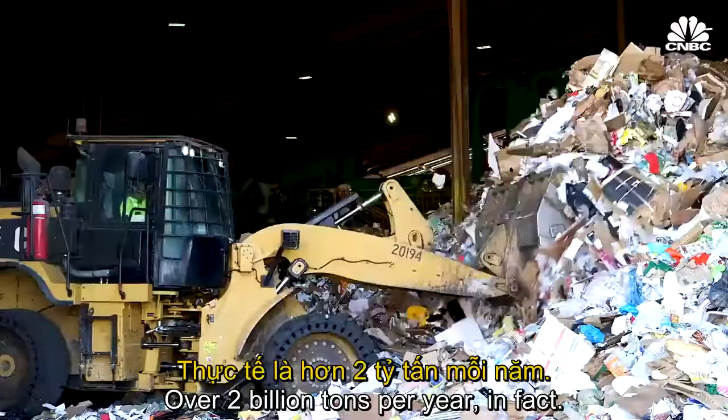Our society produces a lot of waste, over 2 billion tons per year, a number expected to grow by 70% by 2050. That's a line of garbage trucks stretching from San Francisco to New York City every single day. Organic materials in landfills decompose and produce methane, a very potent greenhouse gas. Solid waste—plastics, paper, cardboard—there's a lot of energy within those, carbon and hydrogen. Why don't you do something useful with it?

Converting waste into energy is not a new idea. Usually, though, this has meant incineration, that is, burning our trash to recover some energy. But that has major drawbacks. Incineration creates toxic ash and hazardous chemicals called dioxins, and heat and electricity are pretty much the only usable outputs.

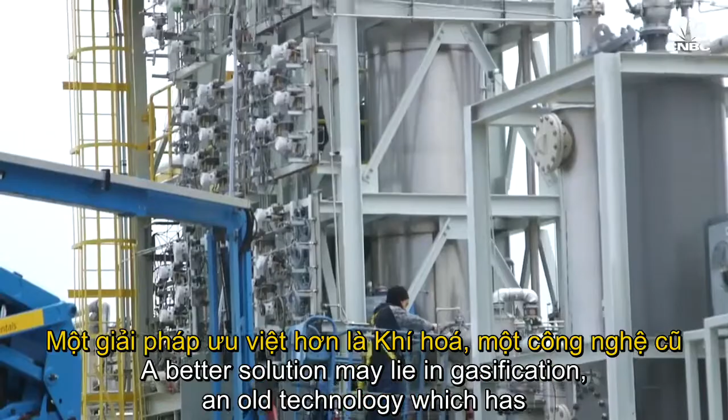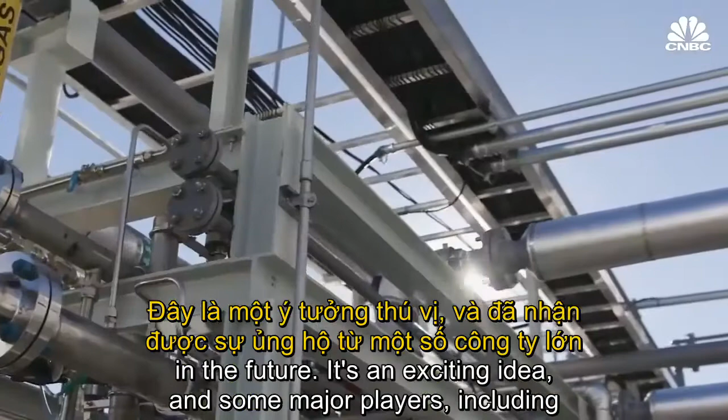A better solution may lie in gasification, an old technology which has only recently been repurposed as a way to deal with our waste. Gasification companies don't burn trash. Instead, they turn it into a gas, in a process that they say is both economical and eco-friendly. The focus is on producing a good quality syngas that can be converted into higher value energy products on the back end, be it electricity, hydrogen, diesel fuel, possibly even chemicals, fertilizer, etc. in the future. It's an exciting idea, and some major players, including the Bill Gates-led fund Breakthrough Energy Ventures, have thrown their weight behind it.

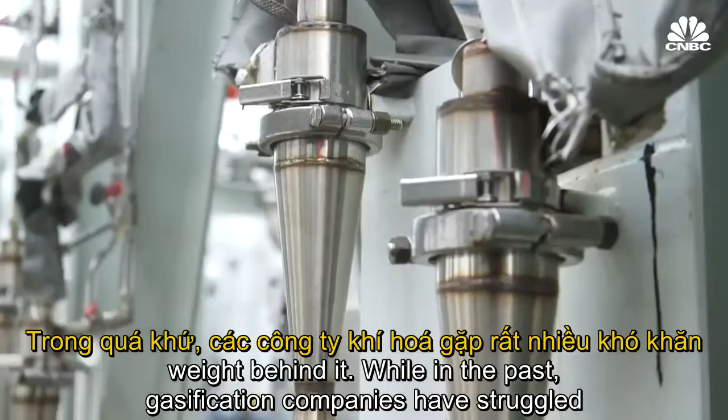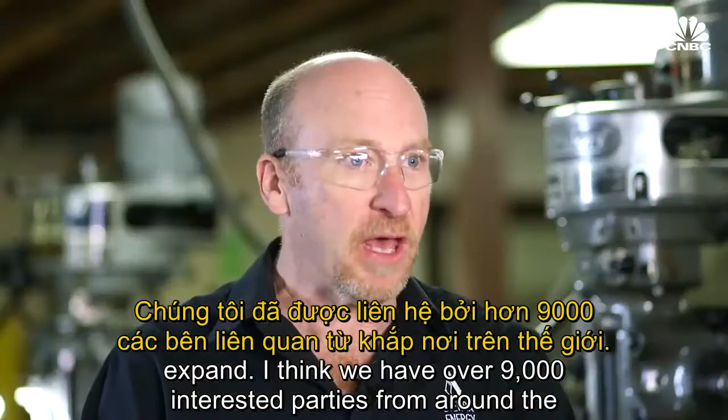While in the past, gasification companies have struggled to scale up and meet their energy production targets, now companies like Sierra Energy, Enerkem, and Plasco say they're ready to commercialize and expand. We have over 9,000 interested parties from around the world who've contacted us already. The question is, how quickly can we get one? The answer is soon.

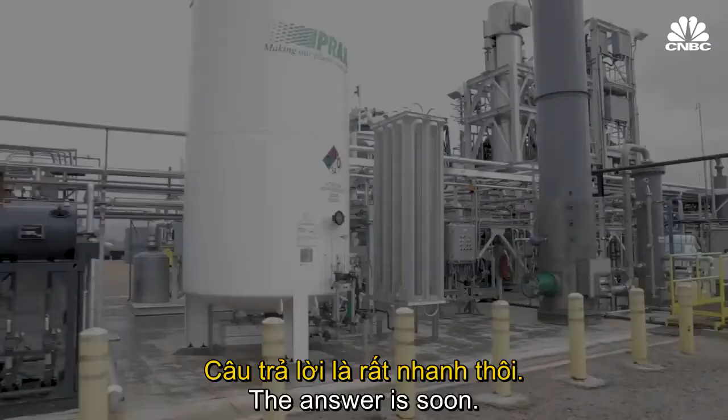The world's first municipal waste incinerator was built in 1874 in Nottingham, England. And like incinerators of today, it converted trash into ash, gas, and heat via combustion. Initially, the purpose was just to shrink our waste. Eventually, though, Great Britain and Germany did start recovering energy from the process, but the idea didn't really catch on in the US. Domestic electricity prices were already low, and as emission standards tightened, incineration got even more expensive compared to landfilling. It wasn't until the oil embargo and resulting energy crisis in the 1970s that the US really took an interest in waste-to-energy tech.

Over 100 waste-to-energy incineration plants were built, but when fuel prices dropped, interest waned. You see a lot of interest in this waste conversion or biomass conversion when the fuel price is really expensive. And then when the fuel price drops, nobody really cares. Today, there are about 70 waste-to-energy plants in the US, and the number is declining.

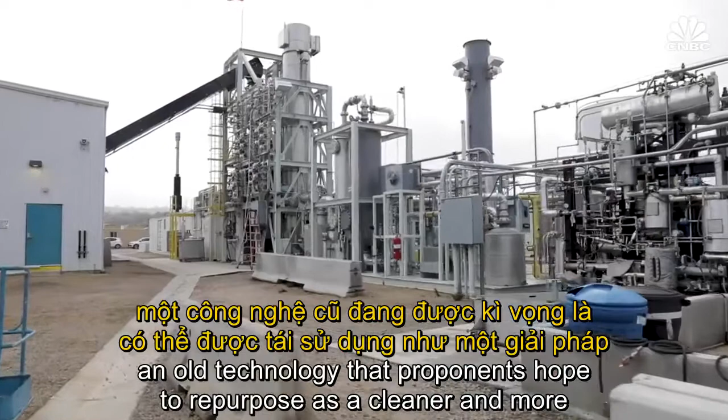But globally, many European countries still rely heavily on incineration, and Japan and China have been building waste-to-energy incinerators at a rapid clip. But many environmentalists say we need a better solution. Incinerators still emit harmful pollutants, especially in countries with lax environmental regulations. So burning waste to get rid of it may appear to be cheap, but the long-term health consequences for the community are terrible. So companies like Sierra Energy are looking towards gasification, an old technology that proponents hope to repurpose as a cleaner and more economical waste-to-energy solution.

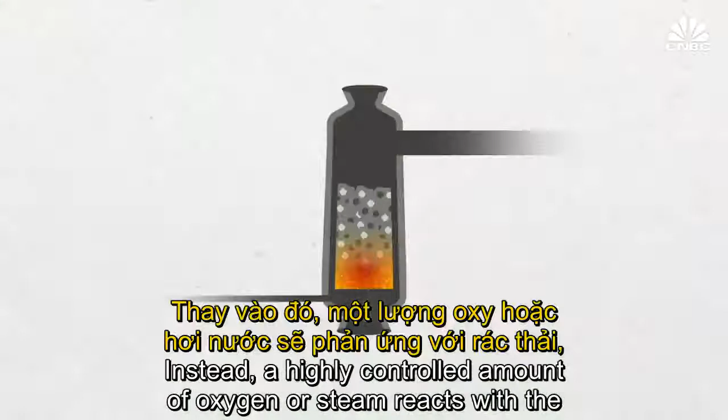In the gasification process, materials aren't combusted. No toxic ash or dioxins are produced. Instead, a highly controlled amount of oxygen or steam reacts with the waste, turning it into a gaseous mixture of carbon monoxide, hydrogen, and other elements.

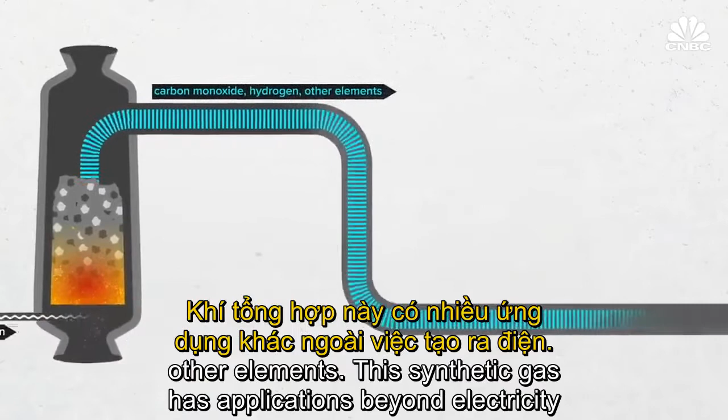This synthetic gas has applications beyond electricity generation. It can be converted into high-value products like diesel fuel, hydrogen fuel, or ethanol. So even if electricity prices stay low, there'll be a market for these outputs. We see much more value in chemicals and biofuels. Methanol is an important building block in the chemical industry. Ethanol, of course, can be blended into fuels.

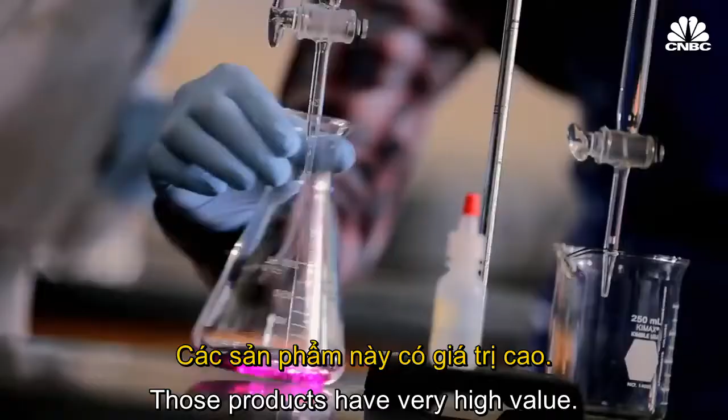In this way, waste-to-energy gasification plants have both upstream and downstream revenue potential. On one side, you're being paid to take garbage that normally would be dumped into a landfill. So that's one source of revenue. You then take that waste and turn it into recycled products. Those products have very high value. And so from a business model perspective, you're getting paid on both ends.

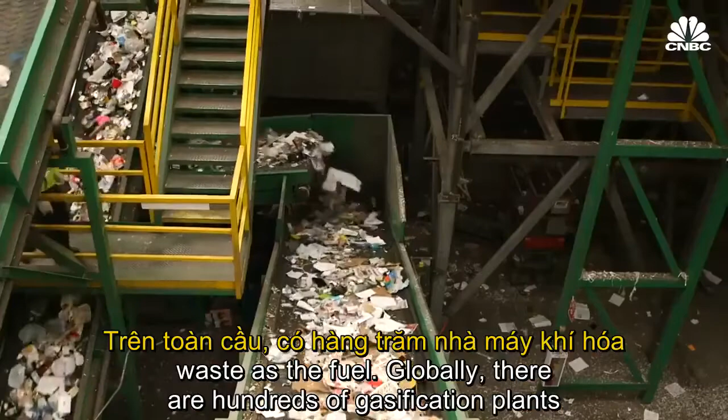But a main challenge facing companies like Sierra Energy, Enerkem, and Plasco is dealing with the unpredictability of using municipal solid waste as the fuel. Globally, there are hundreds of gasification plants that generate electricity from fossil fuels like coal, but waste-to-energy gasification is a whole different game. Tailoring your gasification when your fuel changes over time is the holy grail. And if they can consistently gasify and produce their natural gas from these waste materials, even if the content changes, that's an exciting option. Here are some of the main players taking that plunge.

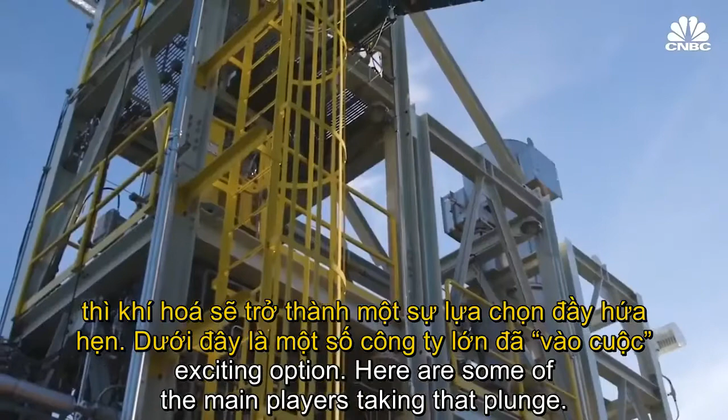Davis, California-based Sierra Energy was founded in 2004. Back then, CEO Mike Hart, who is also the CEO of Sierra Railroad Company, was seeking to improve the fuel efficiency of his locomotive fleet. We were trying to figure out a way to make our own fuel. We wanted to do something better than diesel.

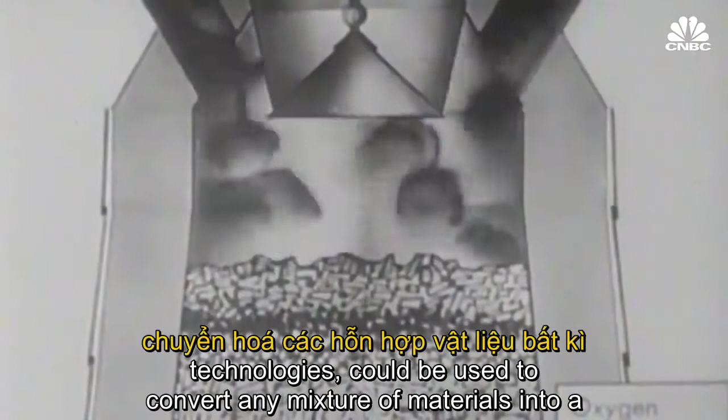He was judging a business competition at UC Davis when he heard about how blast furnaces, one of mankind's oldest technologies, could be used to convert any mixture of materials into a usable synthetic gas. Hart bought the patents to this technology, and Sierra Energy was born. Over time, its mission expanded far beyond its initial reach.

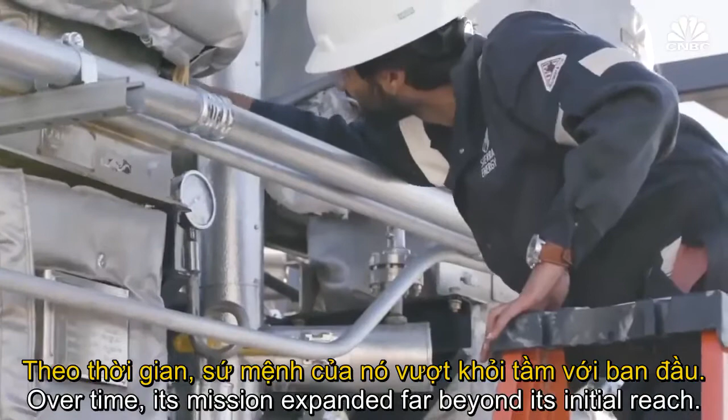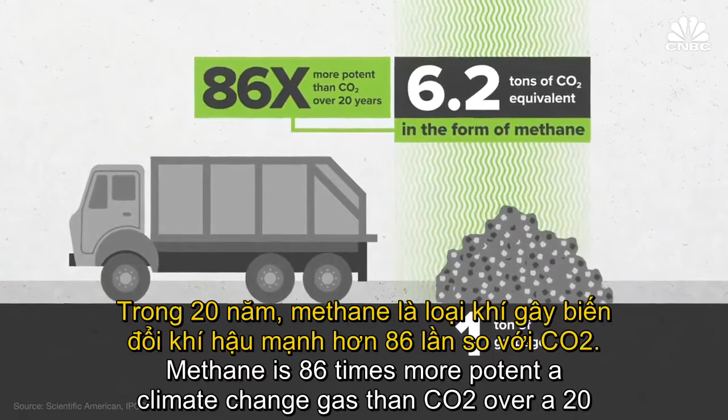People are realizing that climate change is a very real problem. When you throw away 1 ton of garbage, about 6.2 tons of CO2 equivalent goes into the atmosphere in the form of methane. Methane is 86 times more potent a climate change gas than CO2 over a 20-year period. Our technology provides one way of trying to address that problem.

Last July, Sierra Energy closed its $33 million Series A funding round, led by Breakthrough Energy Ventures, the Bill Gates-led investor fund that also includes Marc Benioff, Jeff Bezos, and Richard Branson. Now, the company has partnered with the Department of Defense to develop its first small-scale commercial facility at Fort Hunter Liggett in Monterey County, California.

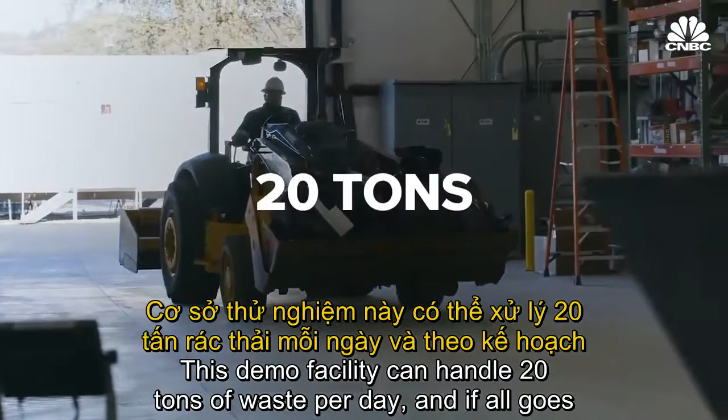This demo facility can handle 20 tons of waste per day, and if all goes according to plan, it will begin processing trash in early 2020.

Ultimately, Sierra Energy says what sets them apart is their use of the blast furnace, a centuries-old technology in the iron and steel industry. Here's how it works.

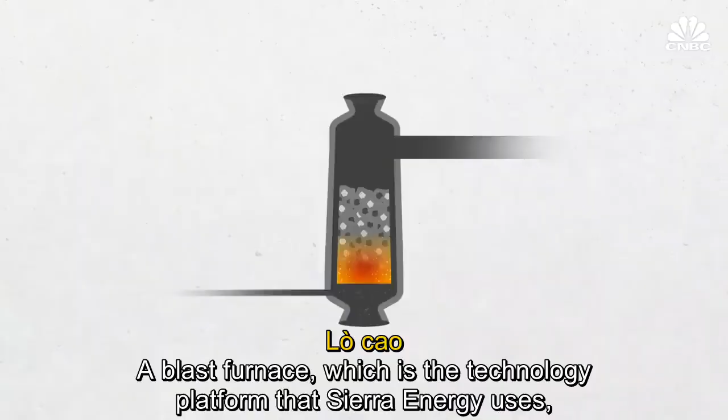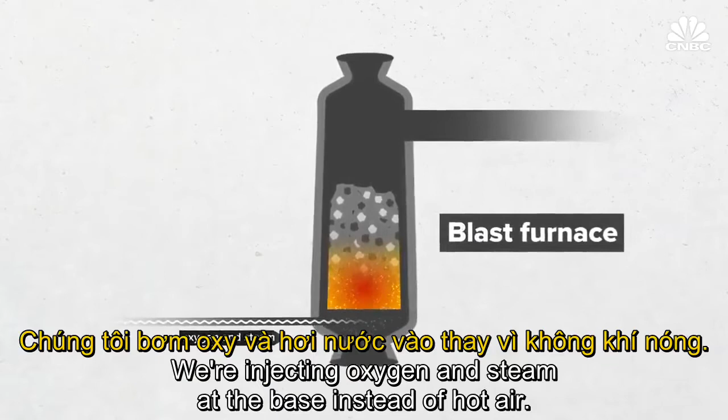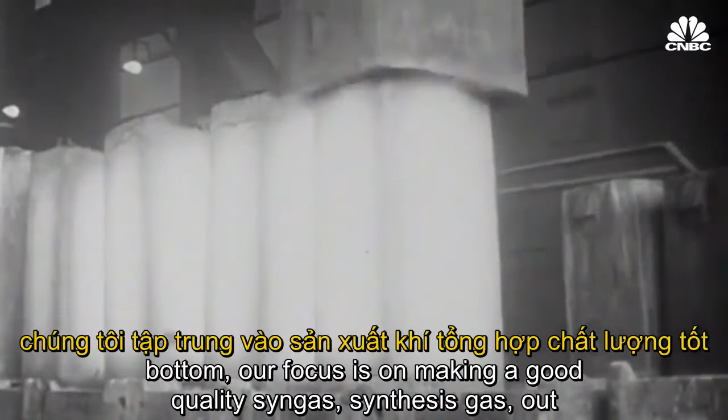A blast furnace, which is the technology platform that Sierra Energy uses, is a high-temperature vessel. Solid materials go in at the top, injectant gases are placed in at the bottom, and you have a big countercurrent heat exchanger. We're injecting oxygen and steam at the base instead of hot air, and at the top, we're placing in solid waste materials instead of those mined materials from the ground. Instead of the focus being producing good quality metal out the bottom, our focus is on making a good quality syngas, synthesis gas, out the top of the vessel.

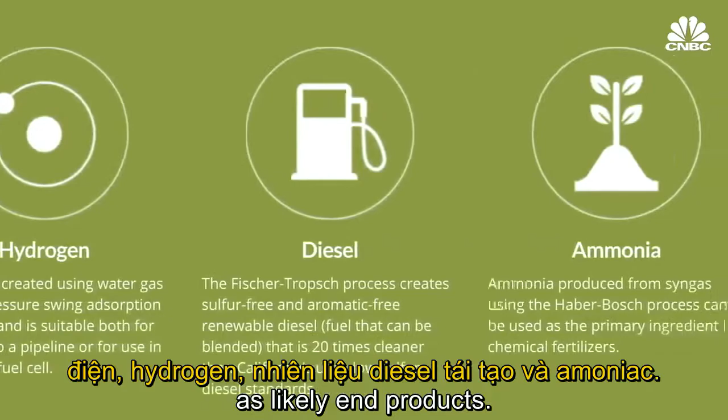Once the syngas is produced, the local community or developer will decide what to do with it. The company lists electricity, hydrogen, renewable diesel fuel, and ammonia as likely end products. About 10% of the waste material can't be converted to gas, and so is instead turned into a stone that can be used as construction material.

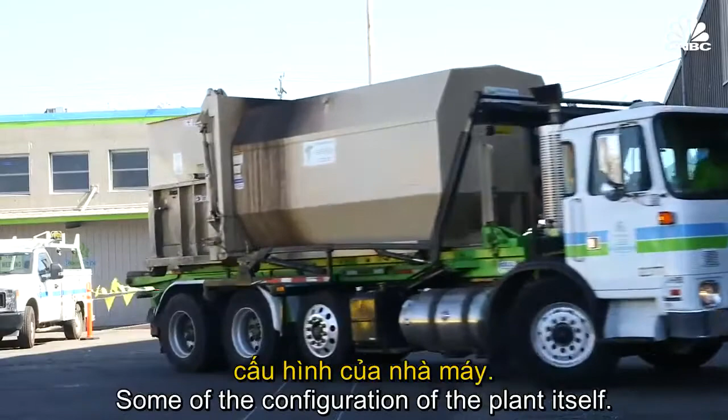Because of this wide variety of use cases, it's hard to say for sure exactly how clean the end-to-end process will be. It really depends on the specifics of the project, how far waste is having to be brought to the location, and some of the configuration of the plant itself.

Hart is confident, though, that in almost every case, it will be carbon negative. Because even if you're making electricity or diesel for a vehicle, the amount of pollution that comes out of the tailpipe or smokestack is less than the amount of emissions that you're offsetting in the first place.

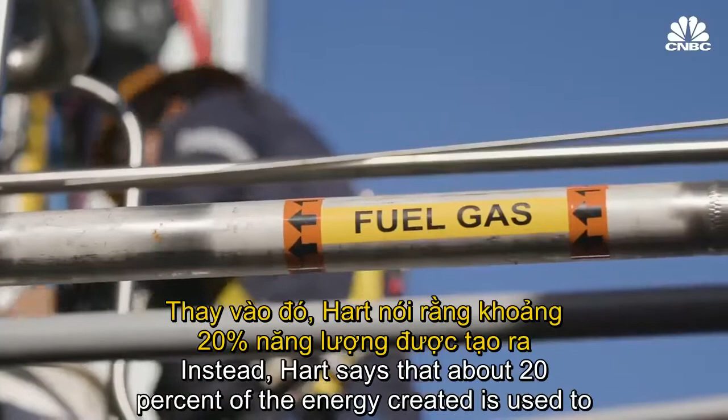Furthermore, Sierra Energy's plant doesn't rely on external energy to operate. Instead, Hart says that about 20% of the energy created is used to run the plant itself. So by some people's analysis, you can make this carbon negative or carbon neutral. By other analysis, you can't quite get there, but it's certainly cleaner than fossil natural gas.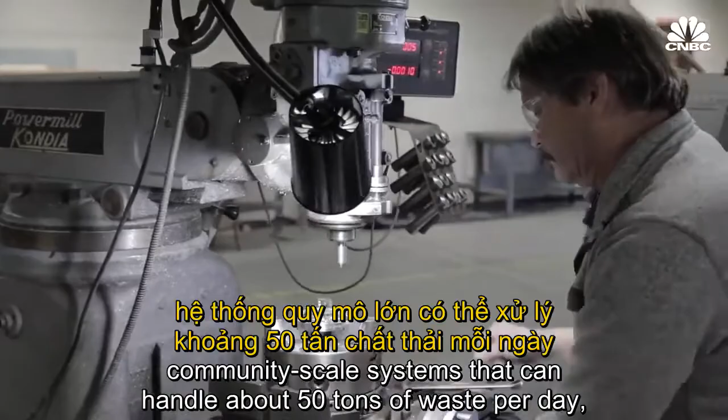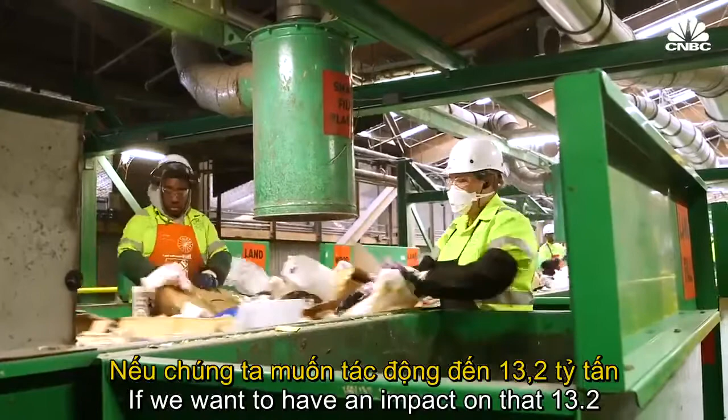Over the next few years, Hart says the company plans to build out community-scale systems that can handle about 50 tons of waste per day, the equivalent of approximately 50,000 people's trash. If we want to have an impact on that 13.2 billion tons a year of greenhouse gas, we need to have thousands of these systems around the world as quickly as possible. That's our goal as a company.

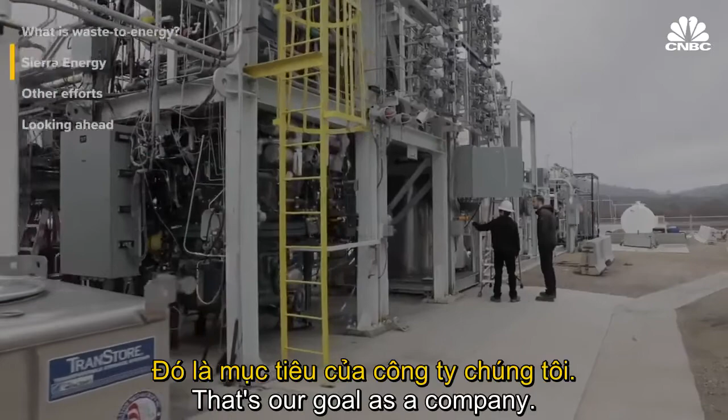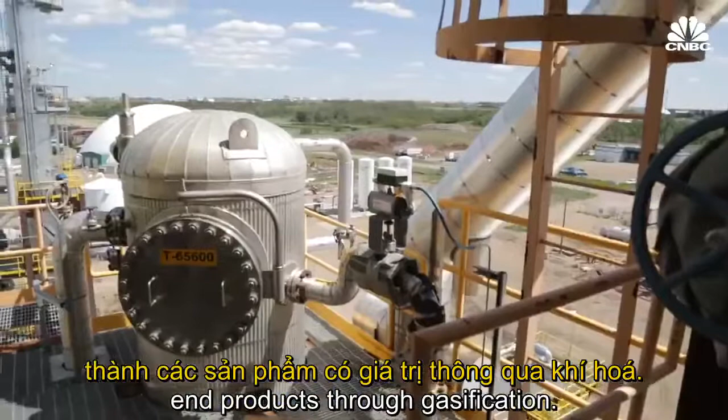While Sierra Energy's most recent funding round has put it in the spotlight, there are a number of other veterans in this space. Two of the biggest are Plasco Conversion Technologies, founded in 2005, and Enerkem, founded in 2000. Like Sierra Energy, both aim to turn municipal solid waste into valuable end products through gasification. But unlike Sierra Energy, these two companies have actually accumulated years of firsthand experience operating full-scale gasification plants, dealing with their fair share of delays and setbacks along the way.

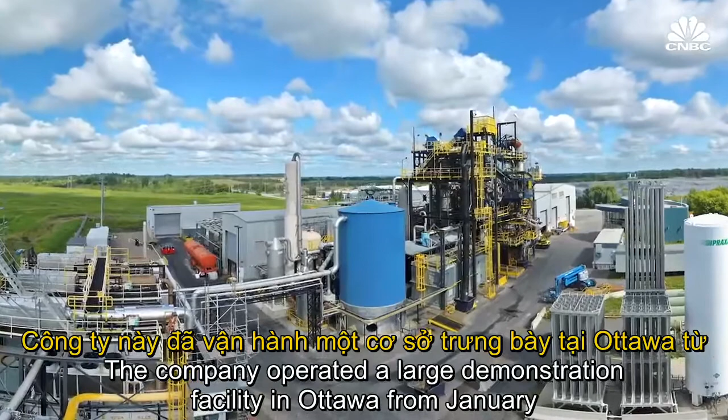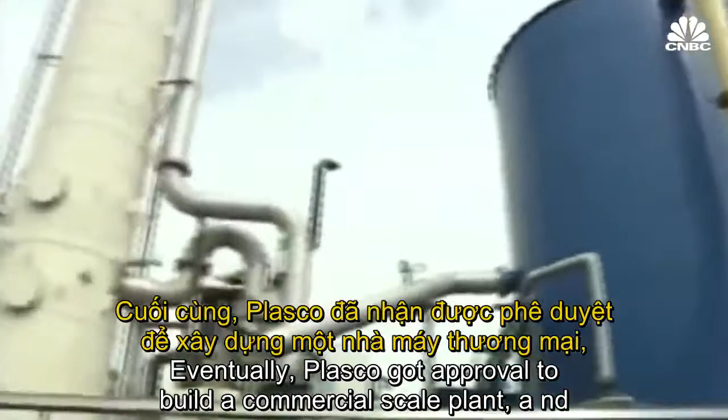Plasco Conversion Technologies uses plasma to refine the waste from gasification into a clean syngas. The company operated a large demonstration facility in Ottawa from January 2008 to January 2015, capable of accepting 135 tons of waste per day. Eventually, Plasco got approval to build a commercial-scale plant, and though the company raised over $300 million, it ultimately wasn't enough. The new plant was never built, the demo facility shut down, and Ottawa severed ties with the company.

But Plasco kept chugging along and re-emerged with a new outlook on the market. We put in 1.2 million man-hours and a decade of work and $407 million. We can tell you many ways that don't work, and what we do now does work.

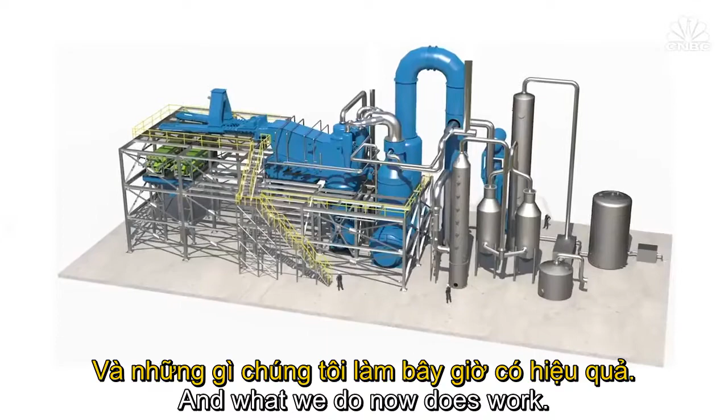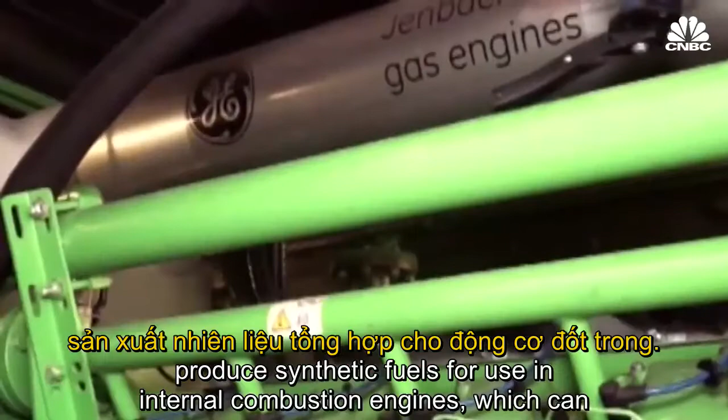In the process, we realized that the waste to electricity market, the waste to energy market, was going away. Unable to compete with the low price of natural gas, Plasco now aims to produce synthetic fuels for use in internal combustion engines, which can power cars, planes, and trains.

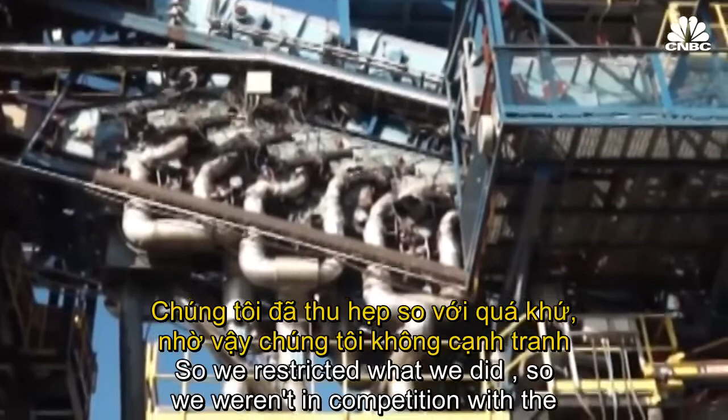The company no longer operates any plants, but it says there are a number of projects in the works. And for these future endeavors, Plasco has slimmed down its business model. We aren't doing build, own, operate, transfer anymore. We're doing selling the equipment and the technology. So we restricted what we did so we weren't in competition with the entire world, but more in cooperation.

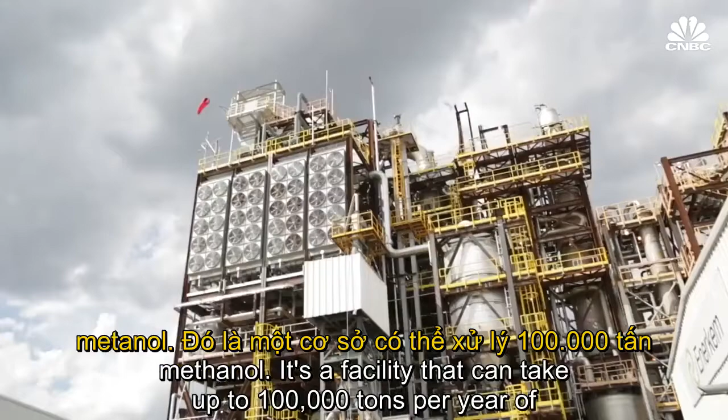Another player, Enerkem, developed the world's first commercial waste-to-biofuels facility of its kind. It's been operating in Edmonton, Canada since 2014, and is currently focusing on turning trash into ethanol biofuel and chemicals like methanol. It's a facility that can take up to 100,000 tons per year of waste, around 300 tons per day. So this type of size would represent a community of around 500,000 to 700,000 inhabitants.

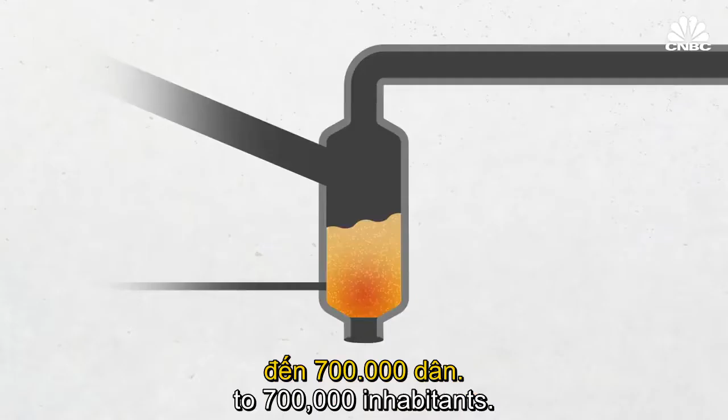This plant uses a technology called a fluidized bed gasifier, in which the trash is dropped into a bed of hot sand, oxygen, and steam. The precise mixture causes the waste to heat up and turn immediately into gas.

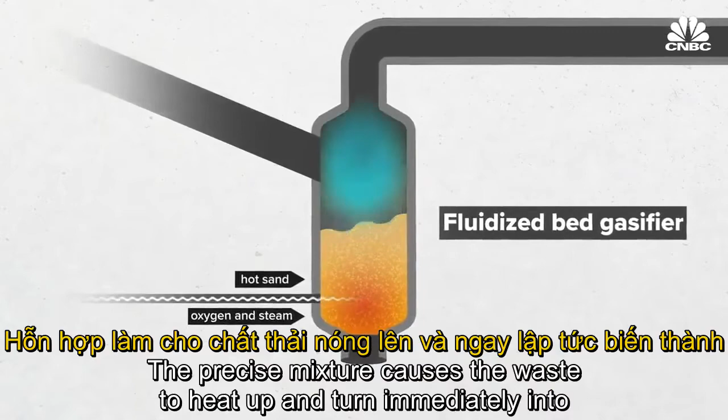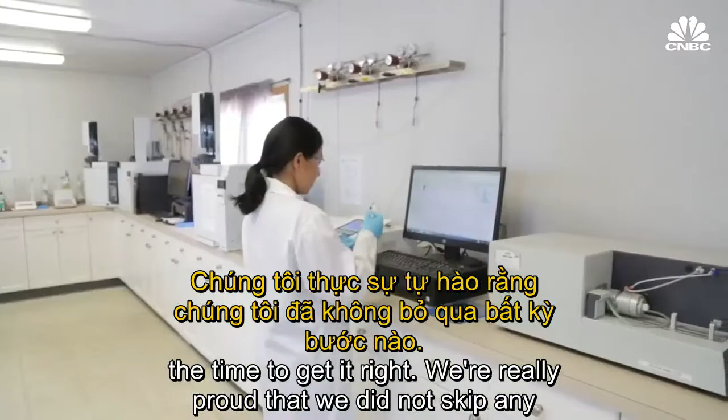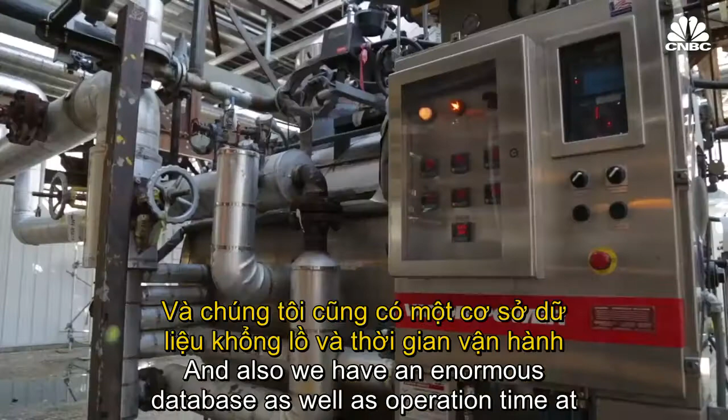We're really proud that we did not skip any steps. However, this comes at a cost. So we have both a patient approach and a realistic approach for innovations of this scale, and also we have an enormous database as well as operation time at commercial level. So these three aspects really differentiate us.

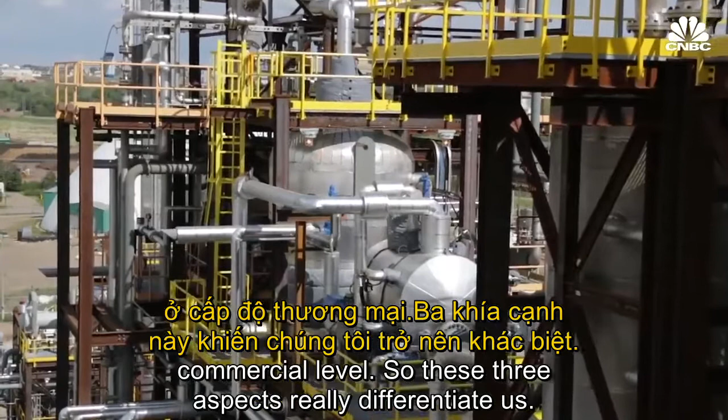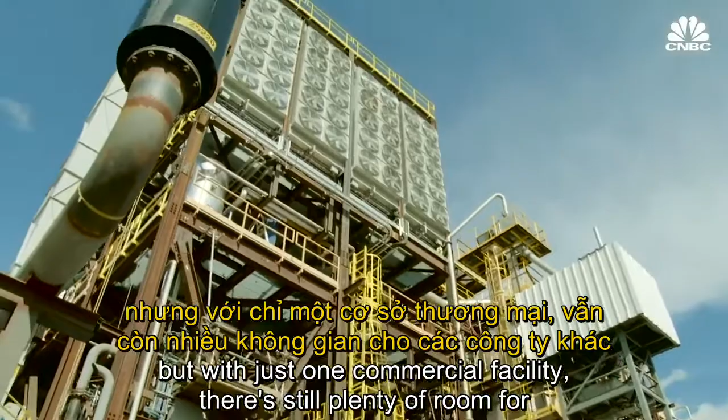In its 20-year history, Enerkem has raised $616.5 million and now has plans to build additional facilities in the Netherlands, Spain, the UK, and Canada. It's one of the most well-established companies in the space, but with just one commercial facility, there's still plenty of room for others to play catch-up and learn from what's worked and what hasn't.

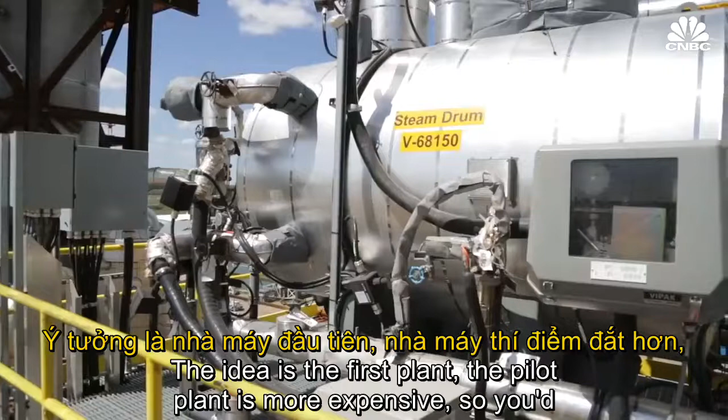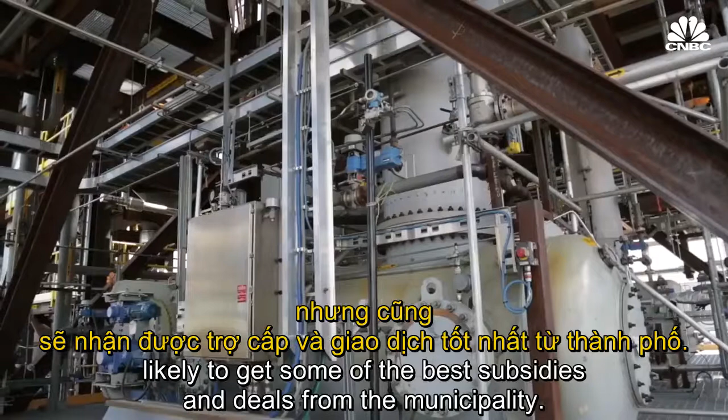Everyone likes to be in the race to be number two. The idea is the first plant, the pilot plant's more expensive, so you'd rather learn from somebody else. On this topic, I'm not at all worried. The first one at large scale may have some kinks in it, but it's also likely to get some of the best subsidies and deals from the municipality.

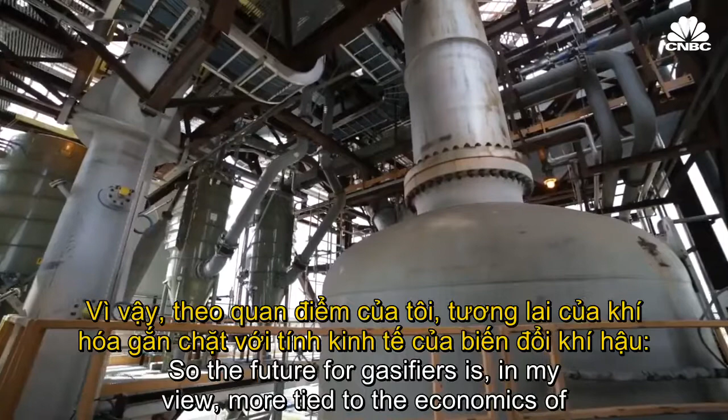These potential subsidies, alongside other policy drivers, stand to play a major role in determining how quickly this tech spreads. So the future for gasifiers is, in my view, more tied to the economics of the climate change story, the prices on carbon, the prohibitions on emitting any fossil fuels, than it is on the technology, which we've known about for a long time. Given current policies, such as California's low-carbon fuel standard, Sierra Energy says it could build many more plants, but not on the scale that they'd like to see eventually.

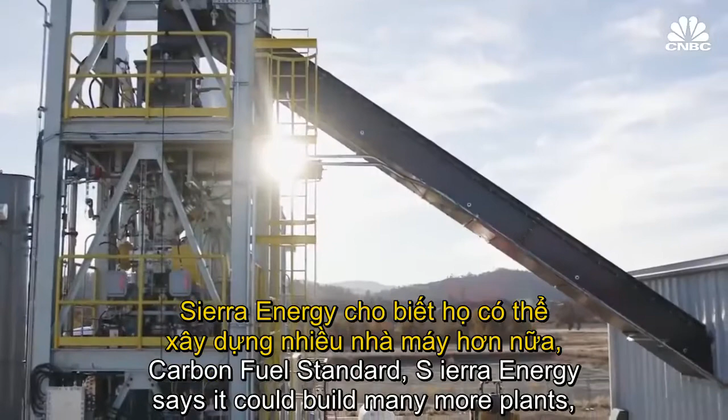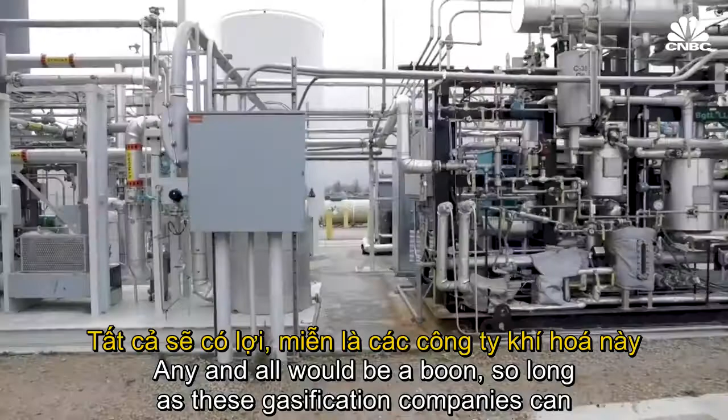To get to hundreds is very feasible, but to get many thousands, that will need different regions of the world to step up and force people to divert waste from the landfill. This could look like higher landfilling fees, carbon credits, carbon taxes, emissions regulations, or subsidies. Any and all would be a boon, so long as these gasification companies can operate as cleanly as they claim.

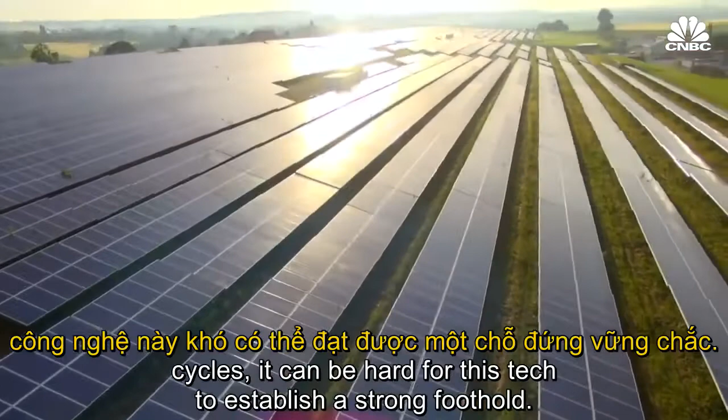But as climate policies and priorities shift in tandem with election cycles, it can be hard for this tech to establish a strong foothold. Once we know, okay, this is the policy that we're going to stick with for 10 years, I think there will be a lot of confidence for these investors. But if you don't know what the policy is going to be, every 2 years or 3 years or 4 years, it's very difficult to make any decision.